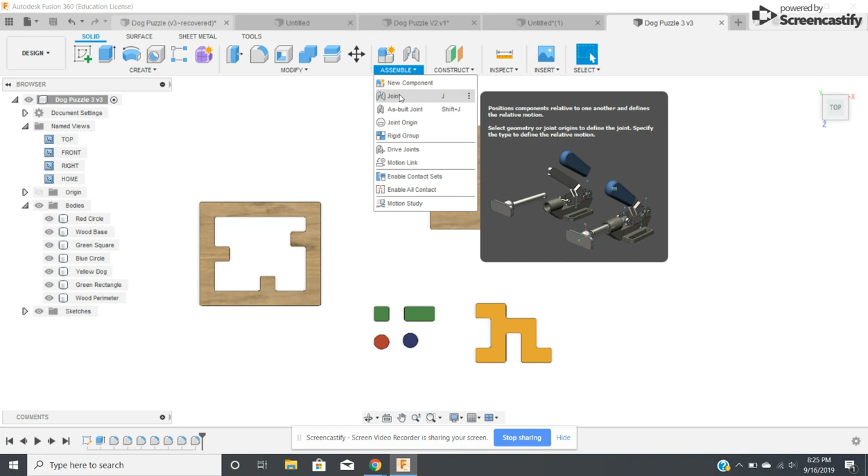We are almost done. The last thing we need to do, which can be tricky, is to assemble all of our components, using a couple different types of options under assemble. The joint assembly, shortcut J, will give us a bunch of options. I'm intentionally showing you this since there are no components to assemble, but you might be saying, well, I'm looking at them, but these are bodies.

So if you right click on the bodies menu, you just turn them all into components. Now these are all components, a different variable, placed in a different category, so this command will now be able to see them. Before, they were invisible to the joint command.

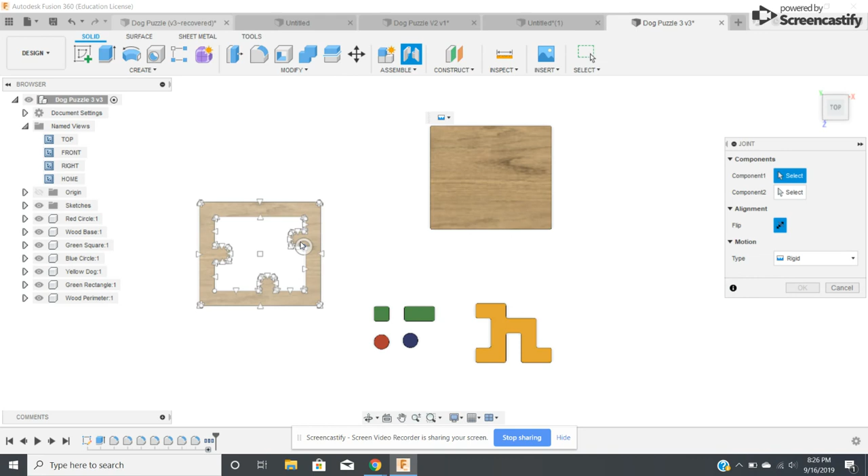One other tricky thing about assembling these things is whatever side you click on first is the thing that's going to move. This isn't going to make perfect sense until you see it. So if I click on the top of this, and then say I want to move it over here, it's going to flip over. I'm not sure if you can tell, but it flipped over - this little tab used to be on the other side.

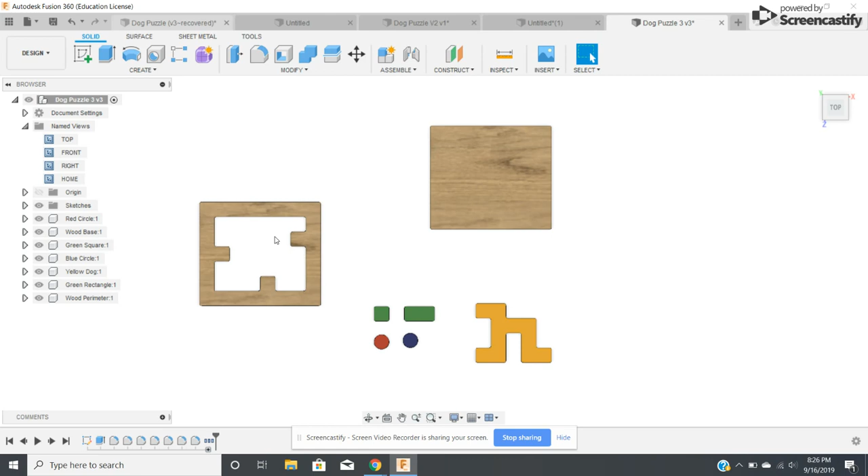Let's undo. So what we actually have to do, for lack of a better method, before we go to add the joint, we want to click joint and be looking at the bottom of the piece we want to move. And it's awkward because this has no middle.

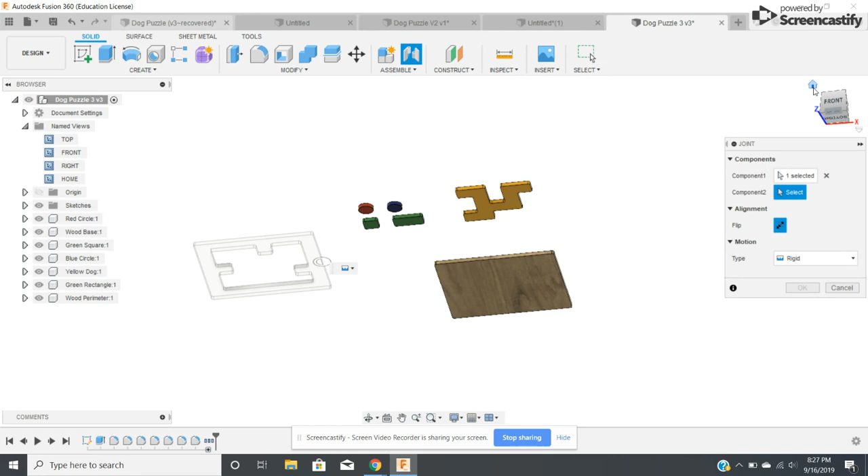So maybe pick something like along the edge. There's a bunch of triangles that show up. I want to click on the bottom face at this location. Now I can use the home button to help me here. Bottom face at this location, I want it to match up with the top face at this location, and it should just kind of line up perfectly. I kind of matched position to position.

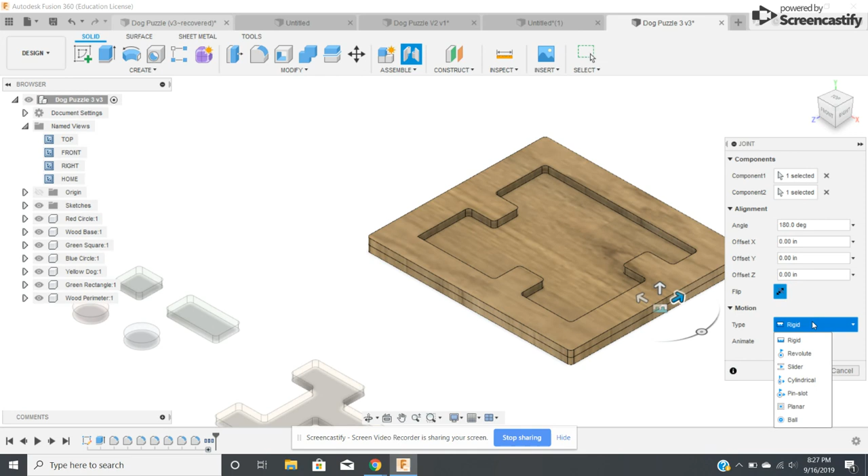But again, I had to click the bottom of the first one on the edge, right in the center, so I had a point of reference I could find again on the other one. Once I click that, I do want this to be a rigid joint, but you'll notice there's a bunch of options here, so today we're going to use rigid and planar. Click OK, everything looks good. Yeah, these look like they're two parts, but in real life they will be, so we're not really going to be hiding that imperfection.

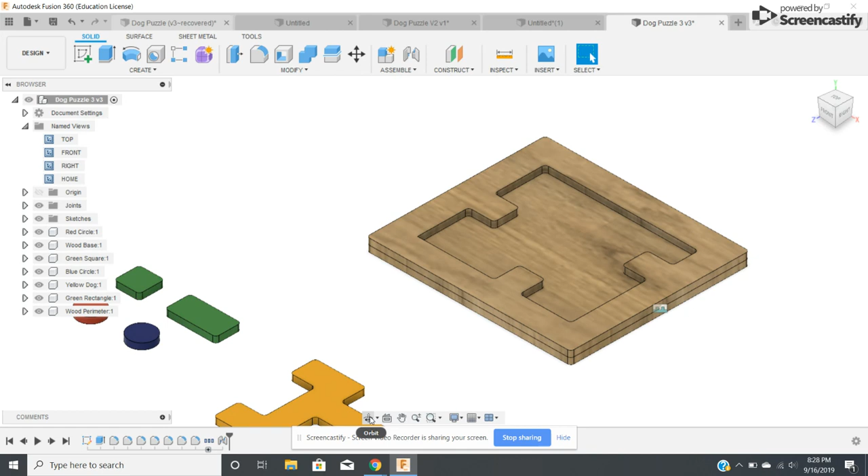That will be visible when we glue them together. Okay. Now, when we go to add these pieces in, they are going to be kind of overlapping, so we just have to be careful that the perimeter gets turned off.

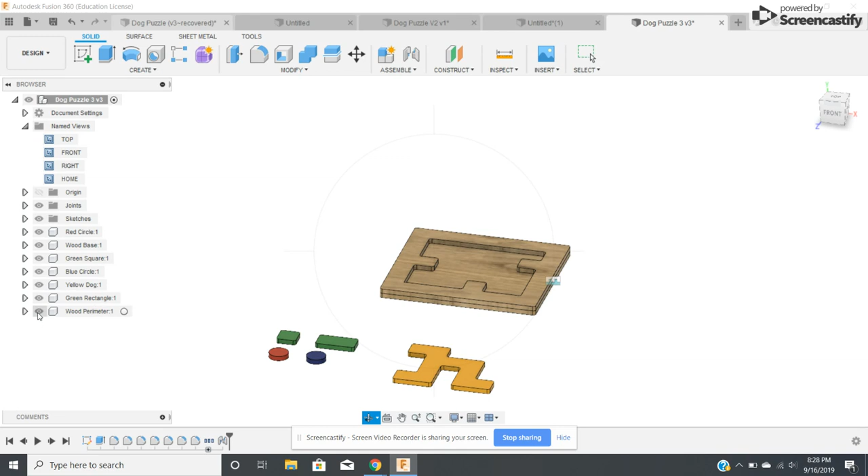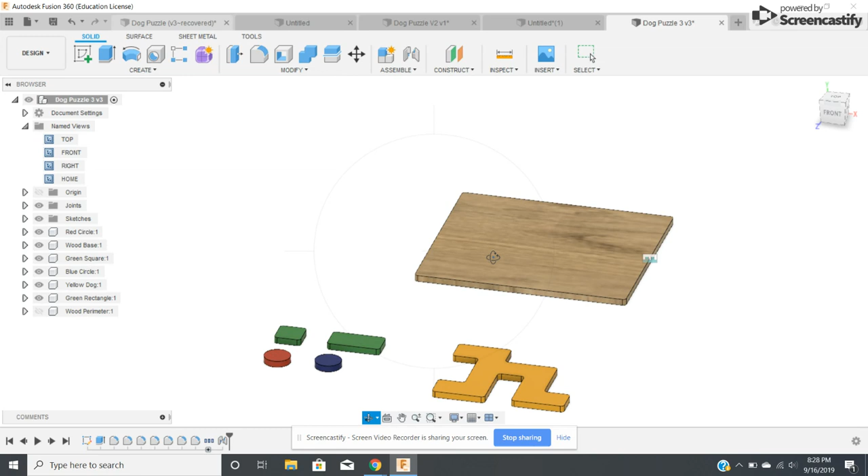I still want to be adding these to here. Now, it doesn't matter, right? In reality, it doesn't matter if I click the top of this square and it flips over because it's still a square. Doesn't matter if I click the top of the rectangle or the circle, because when they flip over, they are symmetric. So that process of assembly should be much faster.

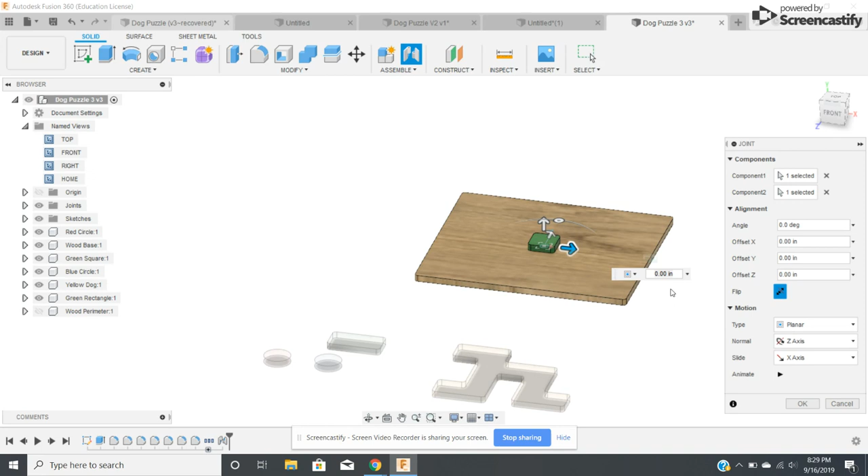I'm going to click on joint, component 1, sure. Click the top of it and pop it right in the middle. It flipped over, I don't really care. But I do want to make this a planar joint, which means it can slide on the x-axis and spin - the normal spins on the z-axis.

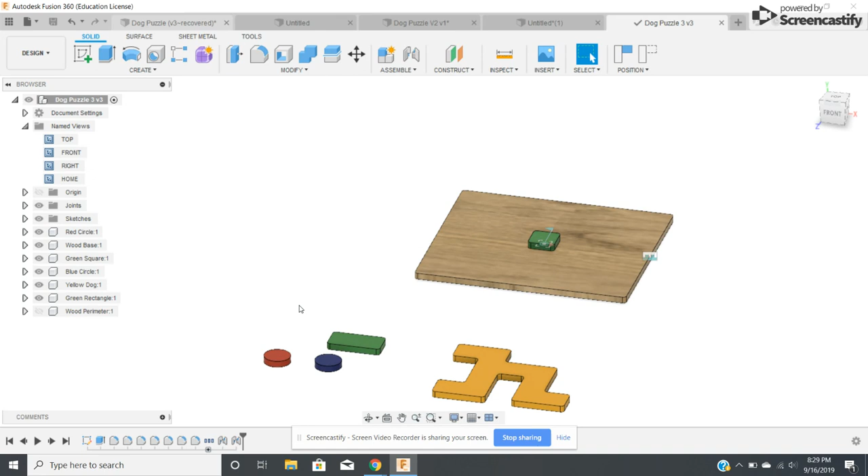Same thing, J. Oh sorry, when it does that, if it says continue or capture position, take a step back and save, because I moved some things around and it wants to remember where they are. Okay, J. Fine, capture position. This guy, to here.

It says, where do you want it? So I'm just going to click somewhere. It's going to flip over, and it's also planar, and that's cool.

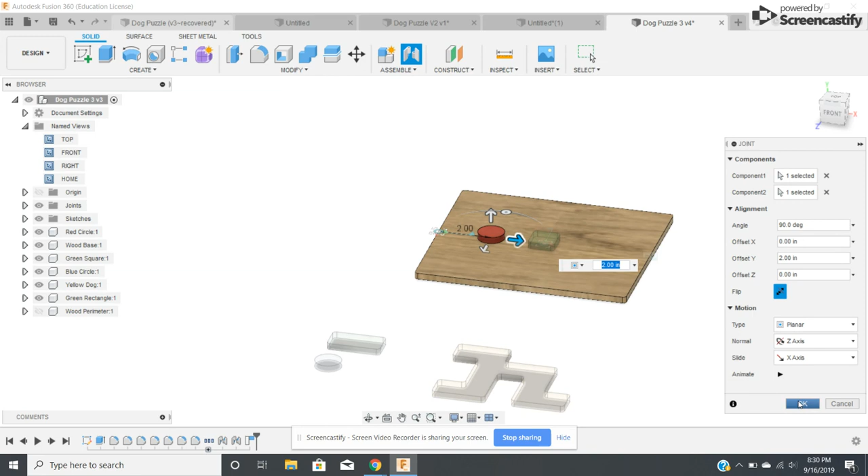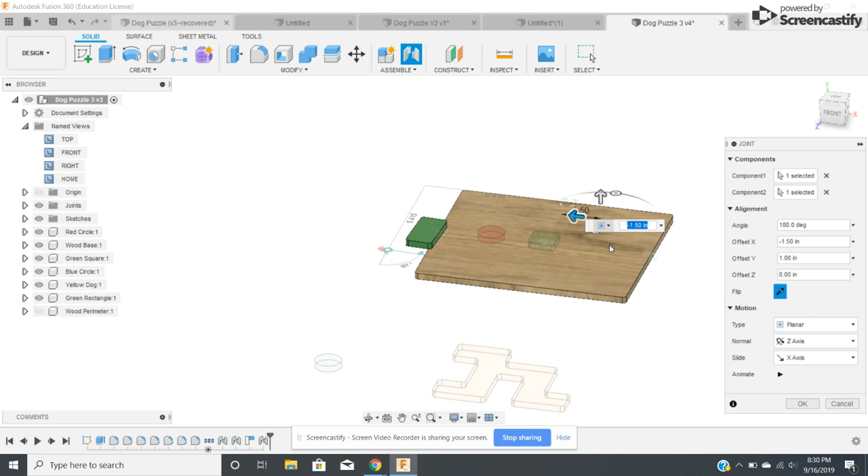J. I'm going to put this on that face. It's going to look like it's dancing around the page, every time. Okay, good enough.

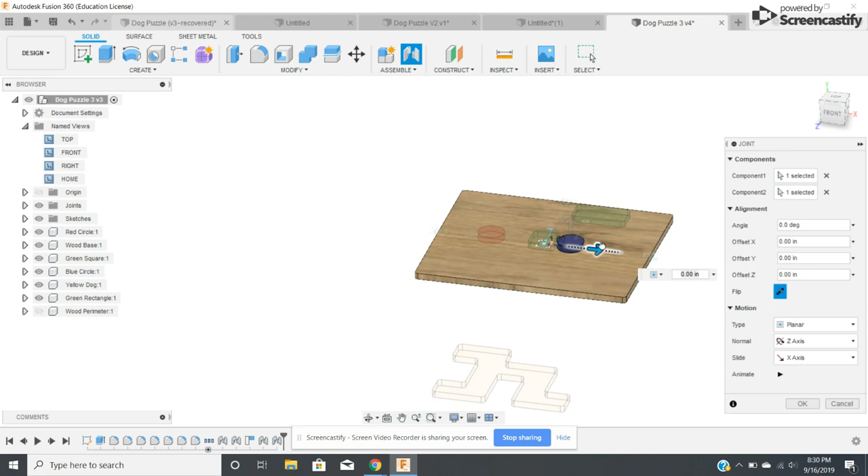So I'm just clicking these things onto the wood base, and I don't really want them stacked up at the moment. I can play around with this at a later date. Still planar, still spins on the z-axis, still slides on the xy - it says x, but it's two planes.

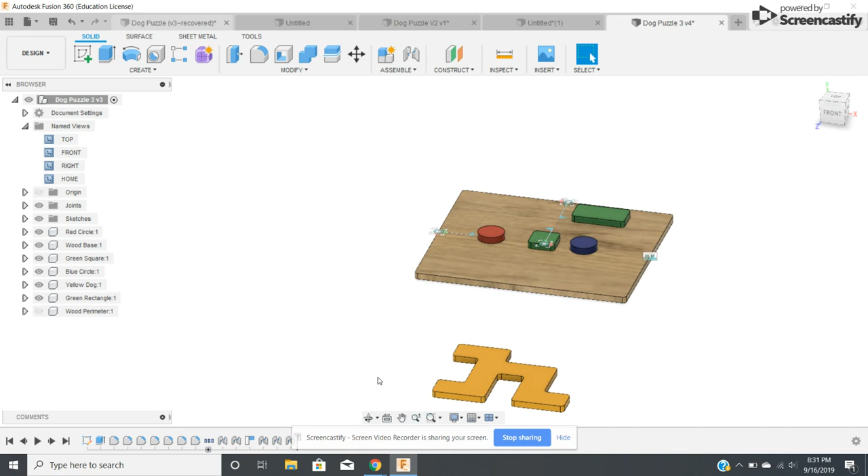And then finally, I do want to click - I don't want this dog to flip over because the puzzle wouldn't work. So I want to be looking at the bottom of the dog. I'm doing this on a trackpad, there's some shortcuts you can use, but I'm going to be looking at the bottom of the dog first. Then I'll press joint, click the bottom of the dog, click home, then click the surface I want it to go to.

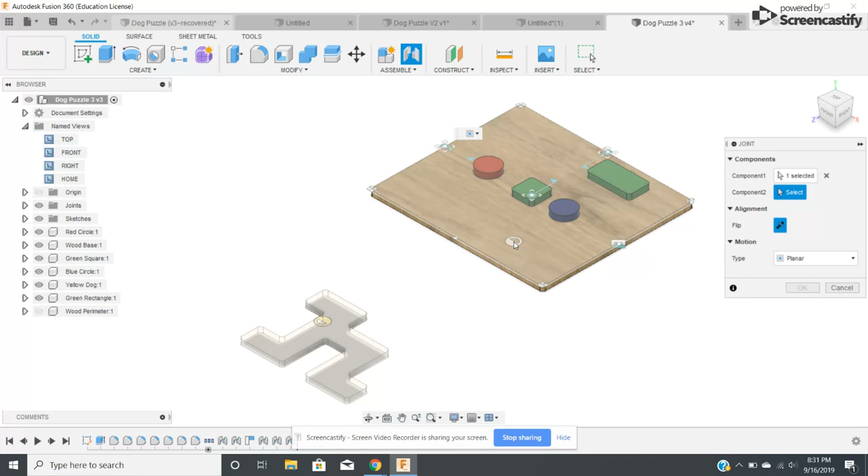So it's spinning around like crazy. And there is the issue, of course, that the pieces are overlapping. And there's ways we can deal with that.

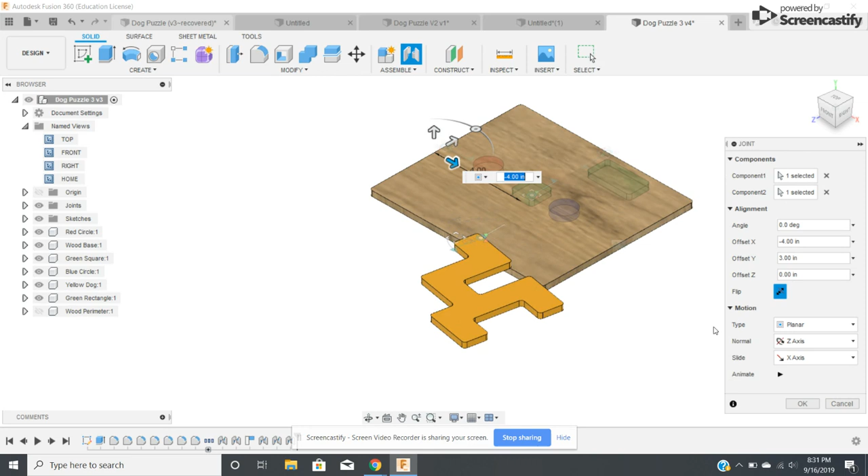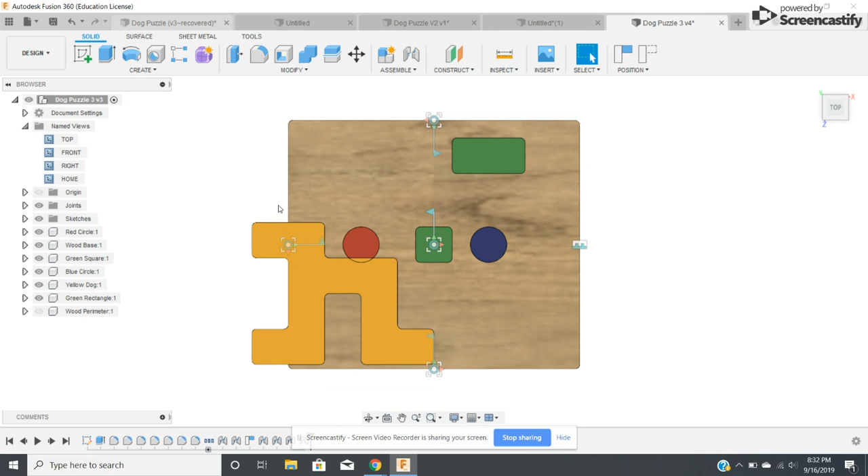But for now, if I look at the top view of everything, I have my pieces, and they have their positions - sorry, a little bit stuck here. I have my pieces and they have their positions and they're all on that plane. Now, if I turn back the perimeter, you can see it looks like a hot mess, so I need to do some rearranging before everything kind of fits nicely into the puzzle. But that's next video.